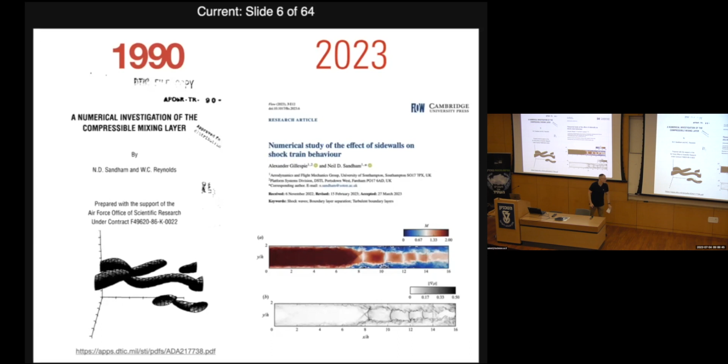And then, the most recent paper just appeared on studying sidewall effects on shock trains. And you can see the evolution of the field over the 30 or so years since he had his PhD. So it's really an honor to have him here today. This is the title and abstract of his talk, Unsteadiness of Shockwave Boundary Layer Interactions in Transonic and Supersonic Flows. I know that's a topic of interest to a lot of you. And with that, I'd like to invite Neil for his keynote lecture.

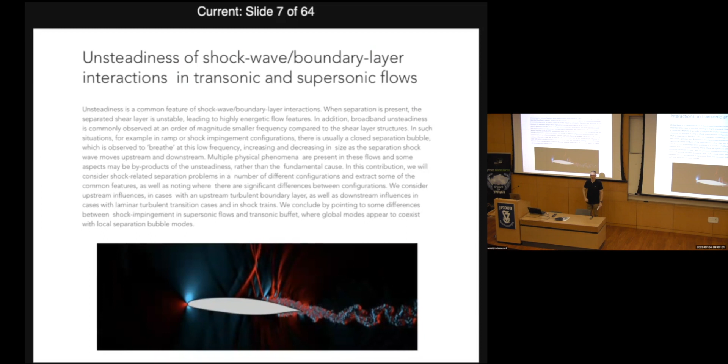It should be working. If not, you can do it the old-fashioned way. Let's slide that. Yeah. Let's do this. And it should work. Okay.

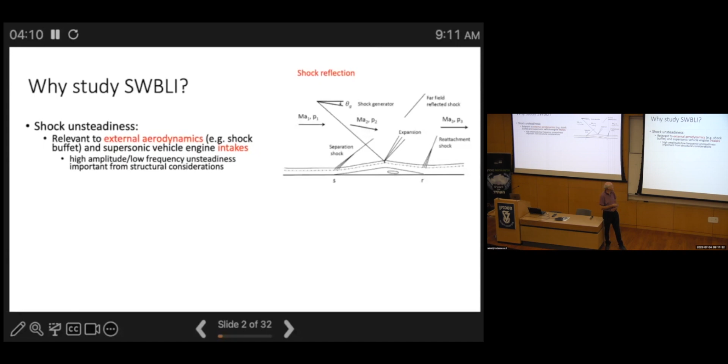So you can see all these types of interactions. So we're usually doing all three: laminar, transitional, and fully turbulent interactions, and we're interested in the unsteadiness, the shock separation, and the heat transfer aspects.

So I have to plug this on the computer.

This unsteadiness is not fully understood yet. So there are many active phenomena. If you go back through the literature, there's 50 years plus of research in this area. And particularly if you look into numerical simulations, you will find interesting phenomena. And the question is whether they're actually connected to the low frequency unsteadiness or just sort of a byproduct of the unsteadiness. And current research is really to find out what the essential mechanisms are.

What can we filter out as being sort of a byproduct of the fundamental mechanism? What remains that we can then use to model the flow, and also where can we apply flow control? So it makes a big difference if the mechanism is coming from upstream fluctuations in a turbulent boundary layer, or if it's coming from downstream, or if it's all contained within the separation zone itself, and still whether you can then do flow control with this.

So what I'm going to do in this talk is give you a little bit on 3D shockwave boundary layer interactions and buffets on aerofoils.

I just missed a little bit there. Oops. Let's go through this slide. There we are. Right, there was a little bit extra came here.

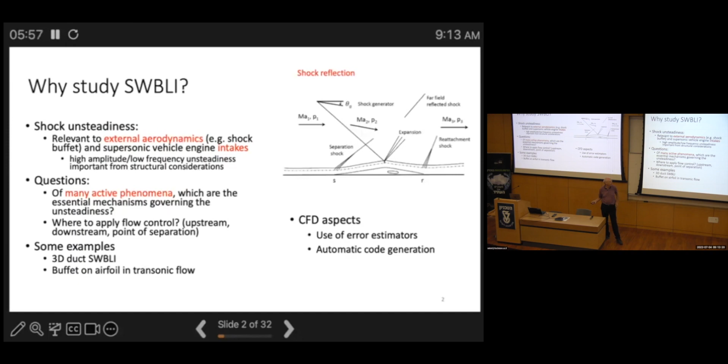So in terms of CFD aspects of what I'm going to talk about, there'll be a use of error estimators, which comes into how we do our large eddy simulations and how we design our grids when we go into more complicated problems. So I'll talk about that later. I'll start off though talking a little bit about automatic code generation. So this is a project that we've had over the last few years.

And it's to do with most places around the world looking towards exascale computers as the next step in capability. We're still wondering exactly what the architecture is going to be for that. And we have to take account of the fact that things could change as we go forward over the years. We need codes that can cope with different aspects of this move to exascale. So we're probably going to have some mixture of CPUs and GPUs. We can expect other changes in architecture. We start to worry about some of these other aspects. So energy efficiency is really important.

Tolerance: if you're running on millions of separate processors, what happens when one fails? Do you lose the whole job, or how can you recover from that? Data compression is a big problem, so we can't actually transport all the files now back to our local machines for post-processing. We will have to do almost everything in the simulation as it's running, and that includes doing the graphics. We don't really want to have to port our codes to every machine as it comes along, because things could change quite rapidly.

Very well, okay. Let's go back to where we were. Right.

So the ideal is this idea of a separation of concerns, that you as a PhD student or a postdoc working on this, or somebody in industry, you shouldn't have to be an expert in formulating the equations for your problem, doing the numerical method, and doing the optimization on the parallel machine that you're to use. So the idea is that we maybe design a system where at the front end, the user designs the overall problem. They set the equations they want to solve, they set the boundary conditions, they choose the basic numerical method.

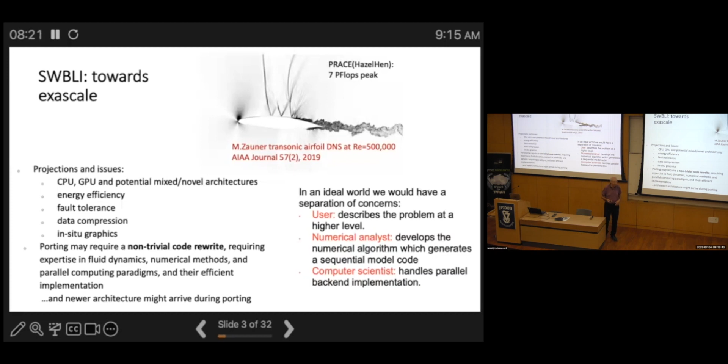Somewhere in the middle, the numerical analyst then develops the numerical algorithm. And at the back end, we put the computer scientists, they're the ones who do the optimization of this for the particular architecture. So people who are interested in developing optimal algorithms for different architectures would be working on the back end. So some time ago, we started looking together with colleagues who were then at Oxford, now spread around a bit. This time Reguly is in Hungary, Gihan Mudalige is now in Warwick.

We started looking at ways that we could use this Oxford parallel structured system. This is a way that we can write C code, or a special form of C code, and they have the software that then does the translation to back-end architectures. So the same source code then works on GPU machines or CPU machines, and they will take care of that final step.

What they've demonstrated is that they could get extremely good performance out of this, as good as handwritten code on the back-end computer. So this is an attractive system. Not the only way of doing it. There's possibilities. So you have to give the OPSC, let's call it, enough information that it can do a good job of optimizing.

So every little loop, this is just something that's doing an average of the +1 and the -1. This is the relative positions in a stencil. This is doing half of the +1 and the -1 and putting that into a new. You have to have all this extra overhead of writing this code that tells the backend how to do the optimization.

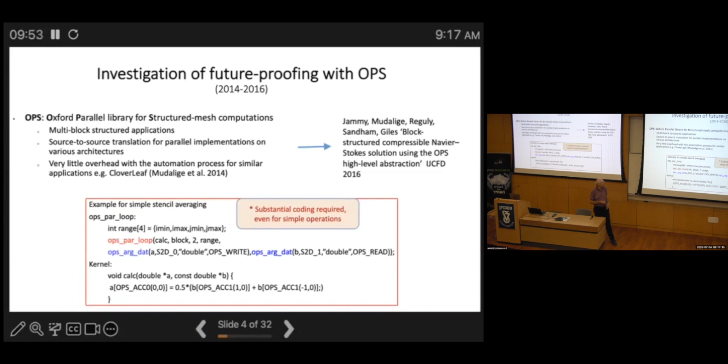So we were too lazy to do this. This looked like a lot of work to write very long code. So what we then looked at was putting a front end onto this, and this was just as Python was coming out with symbolic Python.

So what has developed out of that is kind of an ongoing experiment that we've called OpenSBLI, which is: can we come up with this sort of separation of concerns idea where the user writes front-end Python, then that gets translated with symbolic Python into the OPSC code, and then that gets translated into CUDA or into the lower level code, so MPI or CUDA, that you can then use to run your cases.

So there've been a few versions of this. I'll just explain the basics of them here. And you have various things you have to do within the system to define governing equations, boundary conditions, decide on your temporal scheme and spatial differencing schemes. And it was a way of going in and comparing lots of different finite difference schemes, lots of WENO, TENO schemes without having to do a lot of painful coding with that.

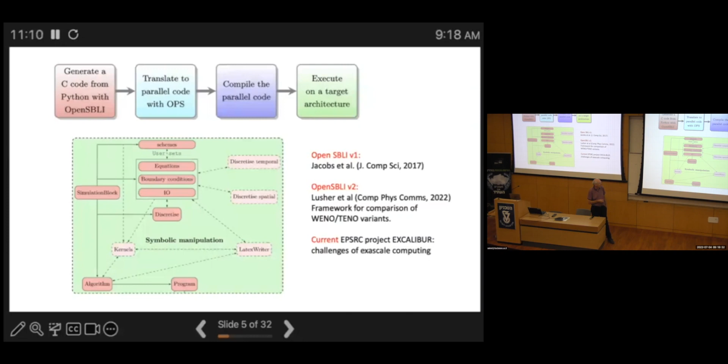So this has continued through a couple of iterations. There was the original version, it was without shockwaves. There was the second version, which included shockwave interaction problems. And then currently we're looking at what can we do with this kind of framework to get us to exascale computing.

Okay, so here's an example of what you actually do as a user at the front end. You're defining your governing equations. So here's the continuity equation, d rho by dt, minus the derivative of rho uj with respect to xj, and that gives us our continuity equation. Go through the same thing for momentum and energy, and you've done your equations. The symbolic Python takes care of expanding this with the Einstein subscript notation, and that then gives you a code, and you've represented your governing equations like this.

So this would then be an example of using this system to do a simple test case, Taylor-Green test case, where you have a breakdown of a simple initial flow in a triply periodic box down to small scale turbulence, and you monitor the enstrophy integral over your simulation, and then you refine the grid until you get to the right solution, you hope. This was compared to a spectral solution.

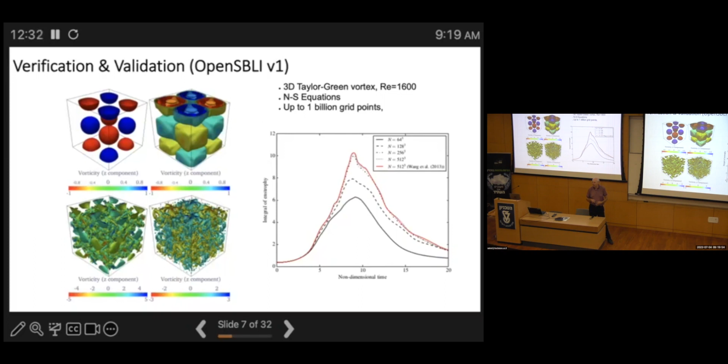There's another version of this, which is a bit more interesting, a high-speed version of this. So if you bump up the Mach number of this, then you will get shocklets forming within the Taylor-Green problem. And that's another challenging case for doing within these numerical simulations. So that's one of the things we've been working on recently.

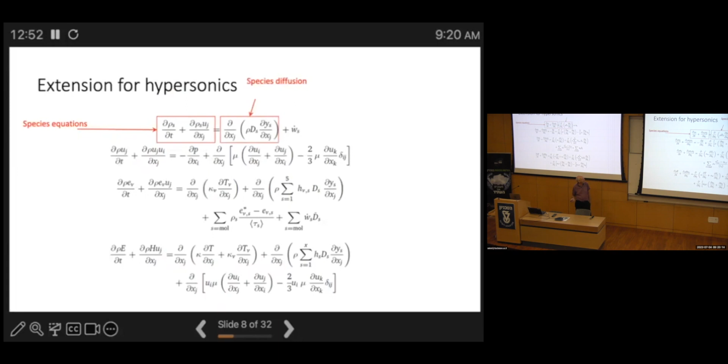The other extension that's come recently is a thing that I guess quite a lot of people have been interested in around the world, which is doing hypersonics. So if you go into a high-speed flow, you have to extend your governing equations. We need separate species equations. We have to add in diffusion terms. We have to add in chemical reactions. We've got vibration energy and non-equilibrium potentially, and we have the relaxation back to equilibrium terms. And we have chemical source terms coming into the vibration equation. So there's probably more of these boxes on here.

So the nice thing about the system here, writing this in Python originally, is actually it's still quite straightforward to write down the governing equations. You just have to fill in extra transport equations. It's just an extra few lines in the source code, and then you can use the symbolic Python to generate all the equations. So the job of actually generating code has been quite quick with this system. Debugging it has then been a different matter.

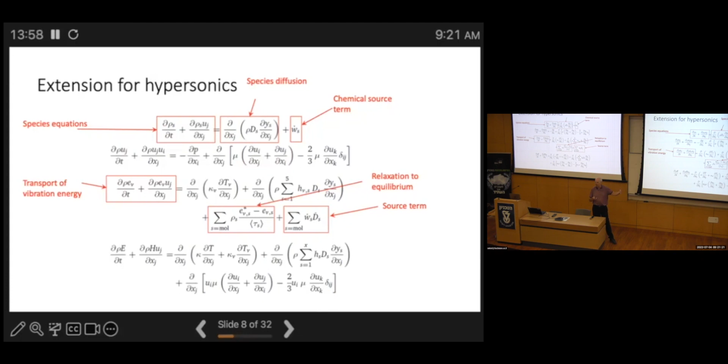So the debugging is where you do need people who are not only experts in the generation of the equations at the front end, but can also look at the numerical methods. And then occasionally we might find bugs in the back end where we have to talk to computer scientists to get that working. So it's not a panacea here. But here's an example of a high-speed thermochemical non-equilibrium example. So this is back to these simple mixing layer problems where I started a long time ago.

So this is a simple roll-up of a single vortex in a temporally developing mixing layer. So it's streamwise periodic, and we trigger the Kelvin-Helmholtz instability. In this case, we start with very high temperature, 4,000 Kelvin in both streams. And the roll-up of the vortex creates high temperature regions. So the region in the braid here becomes very high temperature.

And what you will then find is that you'll get non-equilibrium effects coming in. So in this case, the core of the vortex came down to low values of vibration energy. The braid went to high values of vibration energy. If you look at the non-equilibrium, it's actually the difference between the rotational-translational temperature and the vibrational temperature, which comes in during the entrainment process as the flow is heating up, and the vibrational relaxation is lagging behind. It means the vibration temperature lags behind the temperature rise of the entrained fluid.

And here's some chemistry going on. So this was a case that started from equilibrium. And because the core of the vortex has gone down in temperature, you've actually recombined oxygen atoms into molecules within the core of the vortex. So this is kind of where we're going with our hypersonics, and that's been enabled to some extent by using this code generation framework.

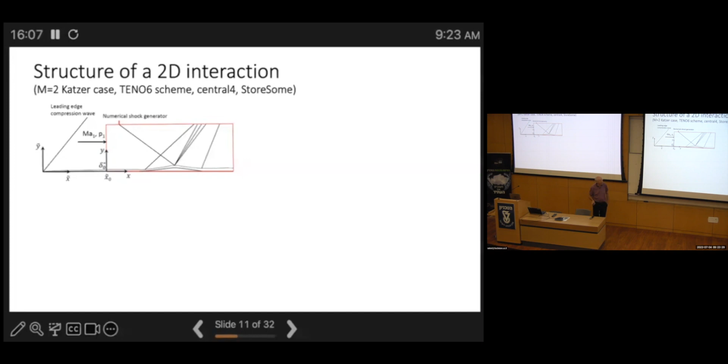So a bit more on physics of shockwave boundary layer interactions, and I'll get onto more numerical methods. So we have a basic test case, which we call the Katzer test case, which is a Mach 2 shock reflection problem. Katzer came through DLR sometime around 1990 and set up this 2D test case. And we're going to take this through some unsteady effects. So I've already shown previously some of the features of this.

So it's often common to do plots like this so that we can see the separation bubble, but you have to mentally unstretch this because this has been compressed in the X direction and stretched up in the Y direction. The actual separation bubble in a 1-to-1 aspect ratio looks like this. So they're very long, very slender separation zones. You've got the recirculation vortex down here. That's where the flow has the negative velocity. That's where the maximum reverse flow is located.

We've got a sonic line. That's the chain dotted line here. And the incoming shock wave will penetrate through the boundary layer until it gets to the sonic line. The waves will bend as they go through a region of decreasing Mach number. And then, in this case, there's an expansion fan that reflects off the sonic line. Those lines are bent as they go through the shear layer, and then you get the expansion fan coming off the back. But you have to remember that this is a very distorted picture of the same phenomenon.

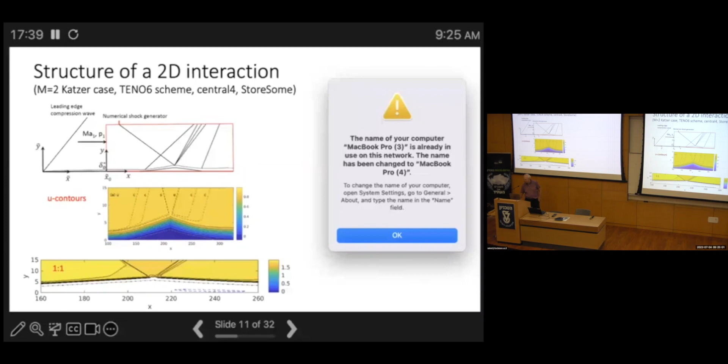Was it pressed twice? Maybe I'll start using the... Oh, hang on. The name of your computer is already on the network. Oh, sorry, I have to look at my phone here. That's why it's not working. Sorry, it's working.

Right, so some quantitative things that we can show about this. So here's the displacement thickness. Momentum thickness is approximately constant through an interaction like this. The displacement thickness follows a triangular shape, so a straight line region on both sides. What's the apex? There's a linear theory that you can do. This is just the standard supersonic thin aerofoil theory. We call it the Ackeret theory, and we teach this. And these are the symbols on this plot here, showing you what you can do with linear theory.

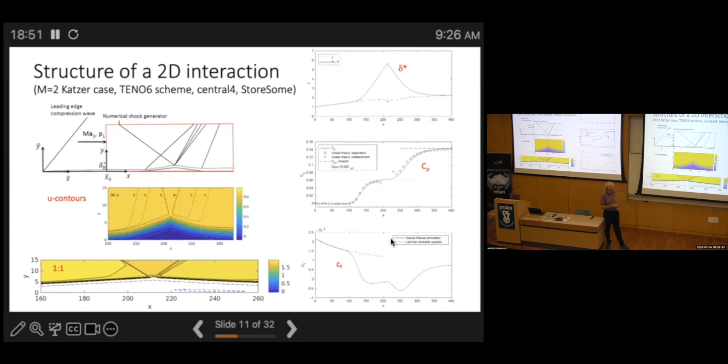And you can work the linear theory from the front towards the center of the interaction, or you can work it from the back again towards the center. And there's a little bit in the middle where it doesn't match, but you can do the separation and reattachment regions with the linear theory. And this then is the basis for the free interaction concept, that the structure of a separation zone is independent of how that separation is triggered. So you can get separations in different contexts. Let me carry on.

So I'm going to do some unsteady work now. So that's the basic test case as a 2D steady flow. We can then put in forcing. So here is some simple forcing put into the density equation. It's like an acoustic source, a simple source set in different regions. So we can put it upstream, downstream, or in the middle. And I'll just show you some examples of what you get if you try and force this shock-induced separation bubble with different frequencies. And there's been a whole study of different locations as well.

So if we force it upstream, but at relatively high frequency, Strouhal number of 1.3, where we base the Strouhal number on the distance between separation and reattachment, then we get a response downstream, which is in the form of alternate low pressure regions that are moving downstream. This is a shedding mode of the bubble. So you put in forcing upstream and you develop some vortex shedding within the bubble. Okay, that's something that we know about.

Okay, if we put in a low frequency, so now Strouhal number of 0.013, and we put this internally, this is where it's most effective at very low frequencies, then we get what's called a bubble breathing mode, and that's where the pressure is a function of time. So because there's a very steep gradient of pressure near separation and reattachment, we find that the local pressure either increases or decreases, depending on whether the shock wave is moving forwards or backwards.

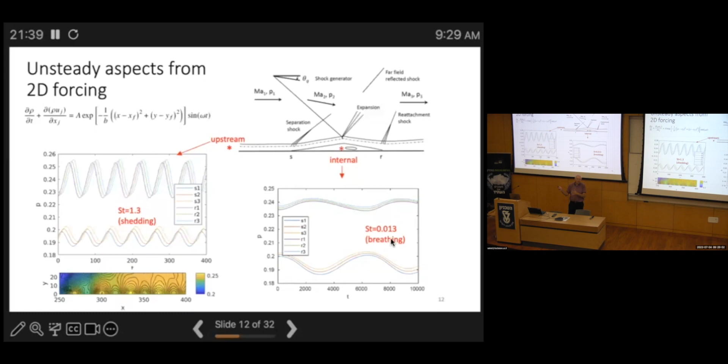So what you can already do in 2D is start to separate out the things that are maybe contributors to the physics of these problems. Okay, so is it an internal mechanism that is driving the low frequency unsteadiness, or is it the upstream? This starts to shed some light on that.

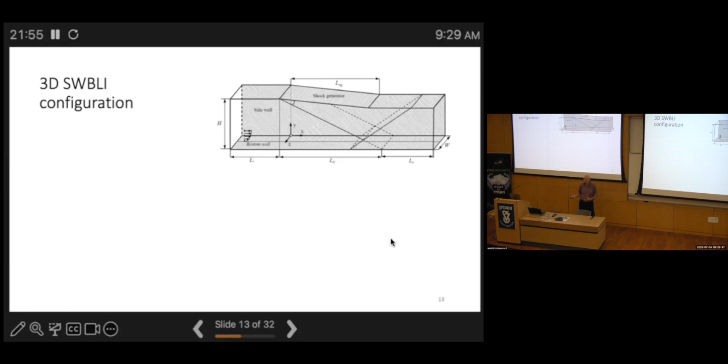Okay, so a more complicated case. This is now 3D duct flow. So we now have side walls in the problem. We've got a bottom wall, and everything is turbulent from the front onwards. There are lots of experiments and lots of numerical simulations, but this will be the first wall-resolved large eddy simulation, let's say.

So we're throwing in enough grid points to be able to resolve all the near-wall regions, but we're probably still a factor of 2 away from a direct numerical simulation in all directions. So these are still technically large eddy simulations, but they're approaching what you would get with a direct numerical simulation.

Okay, so I'm going to show you some results of a long, aspect ratio 2 case, I'll show what that means in a minute, where we ran 23 periods of the expected low frequency. So another issue of these simulations is just the sheer length of time you have to run to get a good statistical sample of your low frequency oscillation.

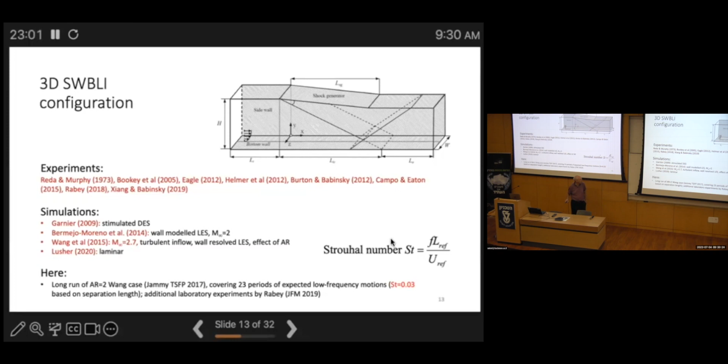And we're interested in Strouhal number. So Strouhal number here is the frequency times the reference length, the distance between separation and reattachment, divided by a reference velocity. And there were experiments as well.

So effect of aspect ratio. Now we're looking at contours on the lower surface. That's our test surface on which we're impinging the shock wave. And if you do it in a very narrow duct, so this will be one of the walls here, and this will be the other side wall. This is our main flow coming along, and there's a shock generator sitting above that generates the shock wave.

We get a very narrow region of separation. That's the dark contour here. It shows where the reverse flow is. And we also have contours of pressure shown here. As we increase the aspect ratio to 2 and then to 4, you'll see that the center of the separation becomes more two-dimensional like.

But you have to go to very high aspect ratios before you get back to what a 2D simulation would give you. The region near the wall actually doesn't change very much. So if you just focus on the region very close to the wall, then that region has stayed fairly constant as we go through the changes.

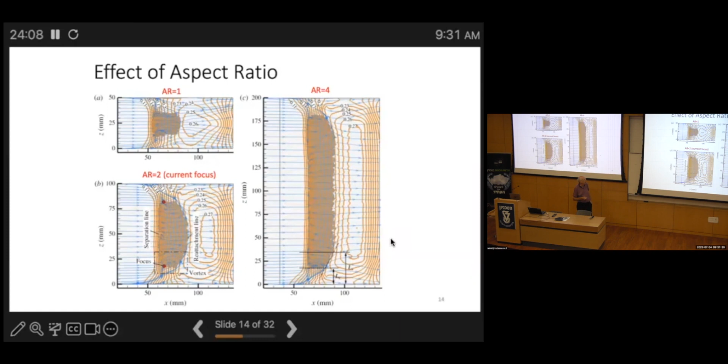So the actual corner flow is not so sensitive to aspect ratio, but the overall flow is sensitive to aspect ratio. Okay, here's a separate view of that, and you'll see there are distinct regions of separation. There's a corner separation here, and there's a central separation.

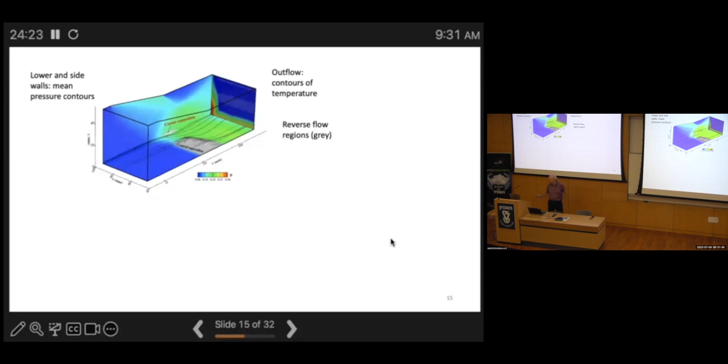So we've got a main separation, we've got a corner separation. We have power spectral densities. Let me just show that one again. So you now take all this data, you've got time series of pressure data on all the surfaces. You then Fourier transform that, you do your Welch algorithm and figure out what's going on in spectral space.

And what we find out is, so the vertical axis here is going in the x direction through the interaction, and we're showing contours of the power spectral density as a function of Strouhal number in this direction. So what pops up at separation, close to separation, is this very low frequency and high amplitude fluctuation. So that's the separation unsteadiness.

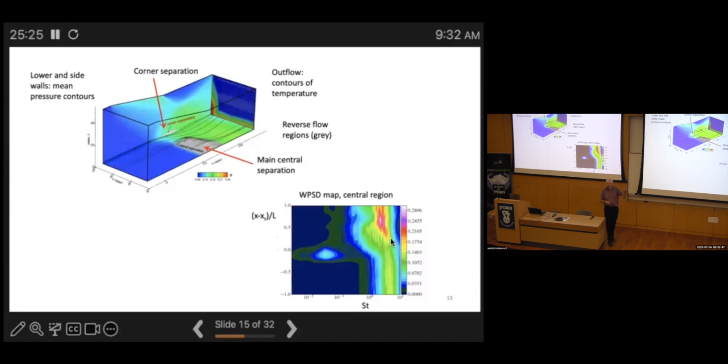This is the turbulent boundary layer that comes in from the inflow. We'll go for the standard turbulent boundary layer spectrum here. That goes through big distortion in the separation zone and then starts to reform, but as a thicker boundary layer downstream of the interaction. And then what's interesting is what happens to this in the sidewall region.

So now we're looking, this is now in a plan view, and this is at Strouhal number 0.03, so this is the low frequency that we're interested in often. And this shows us the main area of low frequency across the core of the channel, but then we pop up these little regions of low frequency in the corner region.

And what we've been interested in is whether the corner separation is connected with the main separation. Because we've got these two different separation zones. They both have low frequency. Okay, but are they kind of in phase with each other, or are they kind of independent? Remains to be seen. These were experiments that Paige Rabey had run at Imperial College that showed similar structure, although they weren't able to measure into the corner regions.

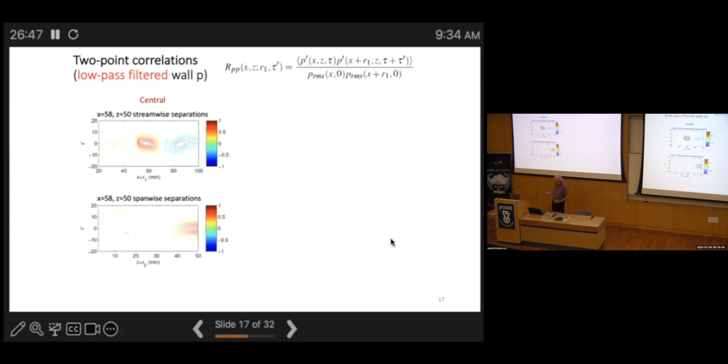Okay, so when we've got 2-point correlation where we get regions that are out of phase, then that corresponds to a breathing mode. We saw it before on the low frequency response of the separation bubble. So where we've got the red regions here, this is our reference point, and then we look in this case downstream. We've got a breathing of the separation bubble because this is out of phase with this one, and we also see the same thing in the spanwise direction in the corner part of it.

So what we were able to say from this piece of work was that the unsteadiness of the corner vortex is not connected with the unsteadiness of the main vortex, even though they're in the same view. They're not actually correlated with each other. They're independent separation zones that are developing.

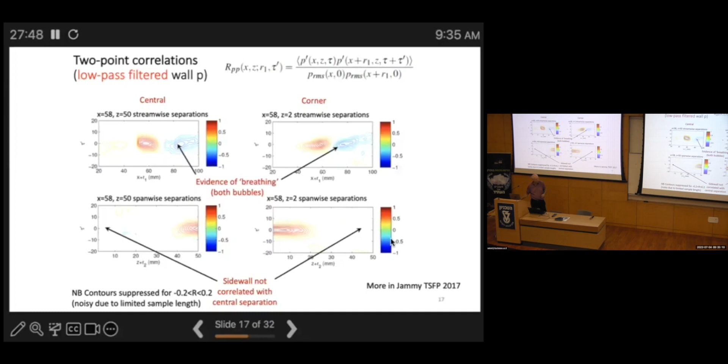Okay, so now I'm going to switch to the transonic buffet. So we've got 15 minutes or so. So transonic buffet is another example of a high amplitude, low frequency oscillation. Okay, but we're going to come back at the end of the talk and look at the differences between these two. You can find global modes in RANS calculations, whereas you can't for the shock reflection problem. So this is an example of a globally unstable flow as found in RANS.

So Crouch and Timme will be two of the names to look for in global modes of these kinds of unsteady transonic flows. So transonic, we have more communication. We have the possibility of sound waves going around the whole aerofoil configuration. So something from the trailing edge would go all the way around the aerofoil, whereas when we have a shock reflection problem, everything is supersonic and we don't get as much upstream influence. It can only go through the boundary layer.

So I'll talk a little bit about methodology and a little bit about some of the results. So this is now back to our original code. This is the classic code, the Fortran code, and the numerical methods are a bit classic as well. So don't regard these as being particularly new now, but at the time, I think we hit on quite a nice combination. So these are explicit codes.

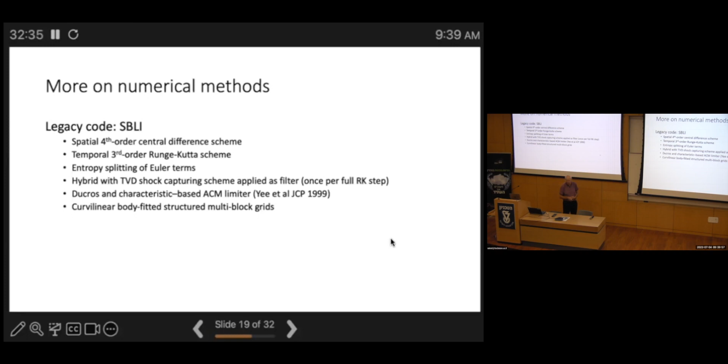There are bits that could be improved, but it's been extended to curvilinear body-fitted multi-block grids in the intervening years. What's slightly new here is the use of spectral error analysis when we get to doing airfoil grids. So we're trying to design our methods for doing airfoils, and we're trying to do large eddy simulation, and so a big new variable is how you design the grid.

And what we did here was borrow an idea from spectral element methods and discontinuous Galerkin methods, where you have access to all the spectral information within all of your elements. What we tried to do was a finite difference version of that, where we break our domain into little 32 squared or 32 cubed elements. We do a Fourier transform to find out what the local spectrum is doing.

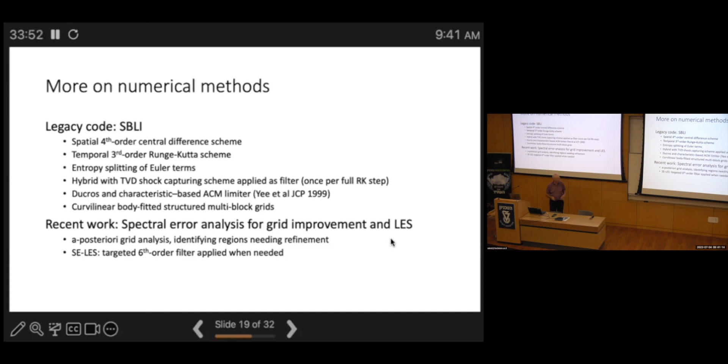And then we make use of the fact that we know how our method fails when it's suffering from low resolution. We know that we get grid-to-grid point oscillations, because we don't have other methods to kill off grid-to-grid point oscillations. So if you know the way your code is going to fail, you can use that to help you tune the grid, so you've got enough resolution in the regions where you really need it. And then we've extended that to do an LES method as well.

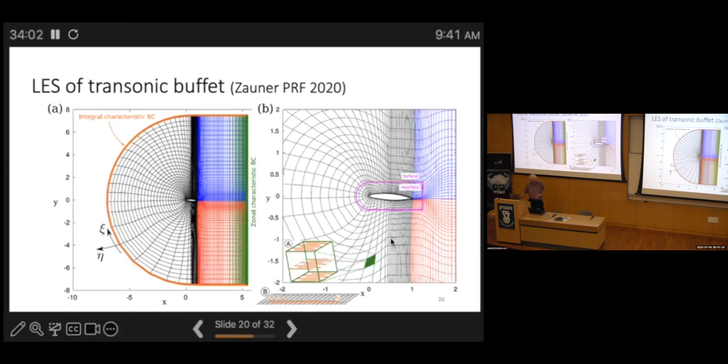So the grids that we're using are horrible structured grids with a multi-block formulation, and we have the usual characteristic boundary conditions around the far field. So there's nothing very interesting there. But the way the code fails is that if we look in the spectrum, we'll see a turn-up of the spectrum at high frequencies, high wave numbers.

And if we know that that's happening, then the idea is to figure out where it's happening and flag up that this region is under-resolved. At this point, we've not got other filters in the problem that are taking out those oscillations, and we don't have a numerical method that naturally takes them out. So we're trying to detect those sorts of oscillations. And we just flipped over two slides. So we can do that without doing an entire Fourier transform.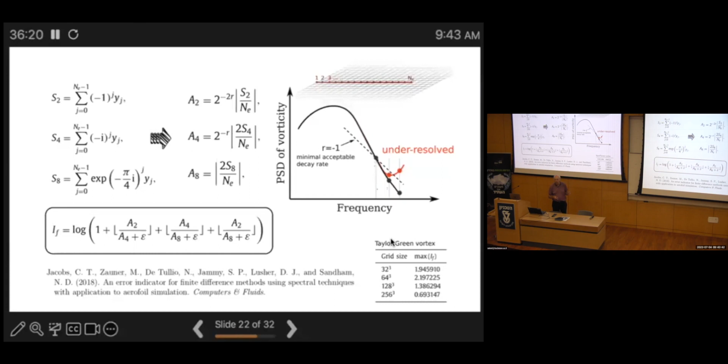This floor symbol here is like an integer truncate in the code, and that means that we would come out with 0 for this if we were in what we think is a well-resolved region of the flow. If your spectrum starts to turn up, then these numbers turn into ones or even higher, and that puts up this indicator function to higher values. So we've got a way of extracting relatively cheaply where the regions are that are under-resolved in the flow. So then you can color code these.

This has actually now gone to the next step where we have a filter that's tuned on this method to only put filtering in where we detect this upturning of the spectrum. So this is the attempt to get this into a large eddy simulation. Then, a posteriori, you can check how often your filter was actually active.

So then we have regions with no color where the filter is not turned on at all. And then we've got regions here that are blue, green, and red. Red means that you're having to apply this filter frequently within your code. If it was a direct numerical simulation, then we wouldn't have any of these other colors. So that's kind of been the use of this.

So two uses. One in designing the grid. You just iteratively run a simulation, tens of thousands of time steps, but not to completion. Check where you're under-resolved, refine the grid in those regions, do it again, and iteratively you get your grid sorted out, and then actually run the simulation with this filtering and see how much filtering you're having to do. There are a few validation cases.

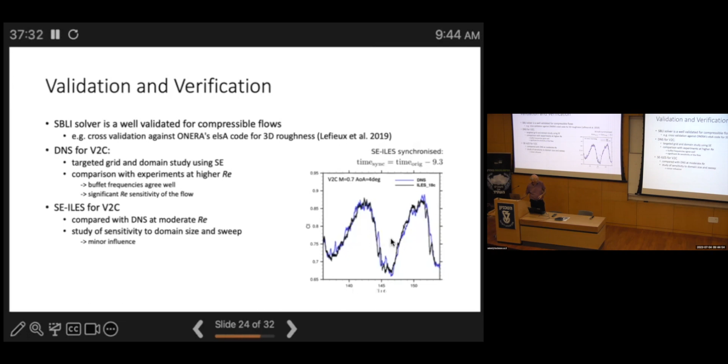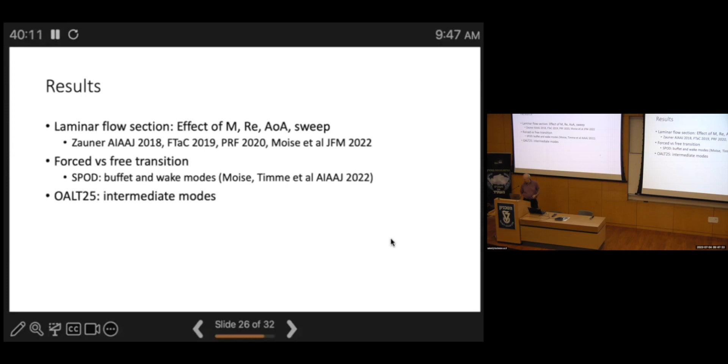And there was also an opportunity to look at some sort of data-based analysis of the different modes that come into these simulations. Okay, and we're still interested in other modes here, say intermediate modes. We're still interested in those. So we get quite a lot out of these XT diagrams.

So we're also querying some of the modeling of this, because all of the modeling assumes you have a single shock wave that then moves upwards and moves forwards and backwards on the aerofoil. Okay, and the shock wave is considered a key part of these theories of transonic buffet. But if you replace one shock wave with three shock waves, as we got here, and we still got buffet, then clearly the single shock wave is not critical to any mechanism of buffet.

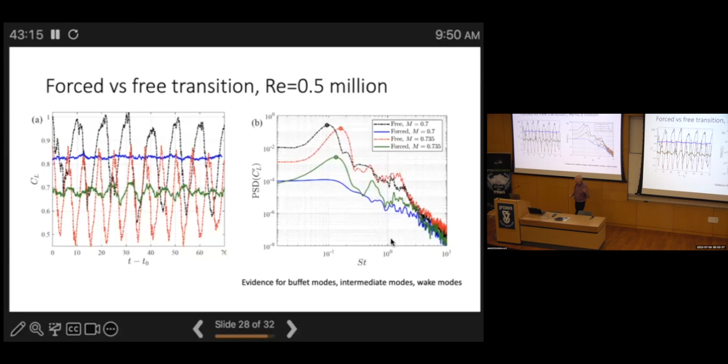If you shift to a higher Mach number where the buffet is better established, you get the red line. And then if you force that, you go to something where the buffet is still present, but weaker. So the problem with these laminar flow aerofoils is the very high amplitude buffet that you get. Here's some examples of high lift and low lift to show you the changes that are going on.

So with the free transition, at the high lift phase, you get a really large region of supersonic flow. And at the low lift phase, you get a small region of supersonic flow. If you look when you force the transition, then you get a much smaller difference between them because the shock wave is not moving as much during this cycle.

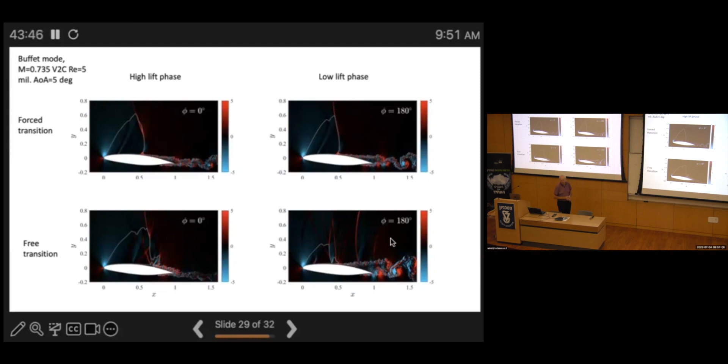And these are some pictures of the different cases. This is the free transition case. This is the forced transition. And then we've got the different wake modes. So the SPOD has been a useful tool here for extracting information from these very large simulations.

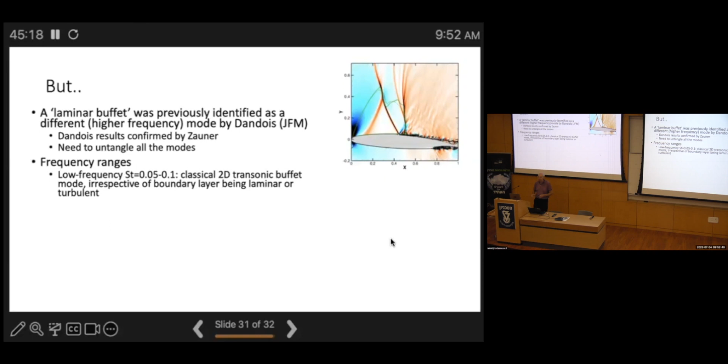Okay, so I've already mentioned we have a naming problem. So laminar buffet was already found by Dandois, okay, but he found it for a higher frequency, which was a separation bubble mode, whereas there is also a buffet mode at low frequency. So what we would argue is that there is always present this buffet mode, whether you have a laminar aerofoil section or a fully turbulent section. Okay, but in some instances, you can get this extra mode in the separation bubble.

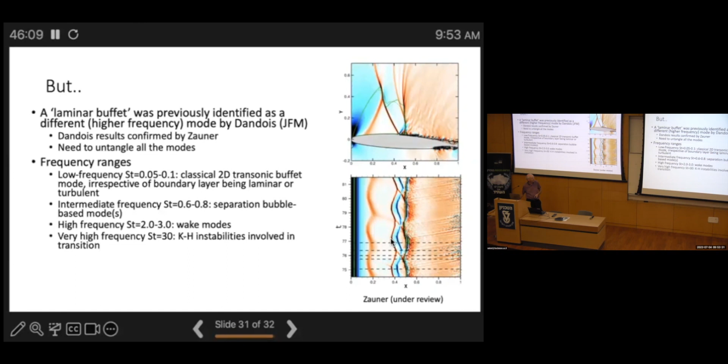And what can happen in experiments is that you can see that medium frequency mode appearing first. So as you increase the Mach number or you change the angle of attack in your experiment, sometimes the very first lower frequency that you observe might be this intermediate frequency. But if you keep going, you will then see the low frequency emerging at a later time. Okay, so we've got all these different frequencies. We've got the classical 2D buffet, we've got intermediate frequency, we've got the high frequency, and we've got Kelvin-Helmholtz instabilities at very high frequency, and they're different.

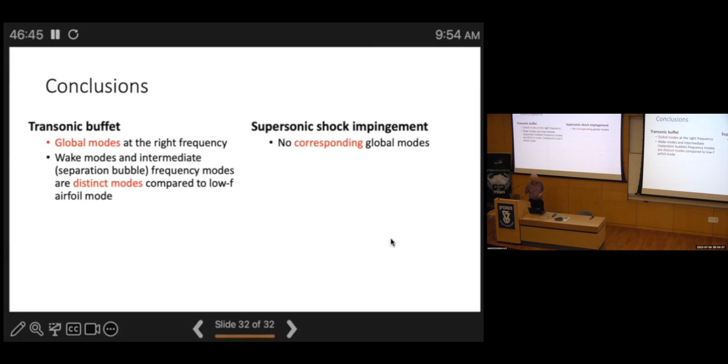So I will just conclude with some of the differences between transonic buffet and the shock impingement problem that we had earlier. So transonic buffet, there are global instability modes. Okay, even in RANS, you can do a RANS calculation and detect these global modes. If you do a supersonic shock impingement problem, then you won't find a global mode, at least for these typical strengths of bubbles. So there's no corresponding global mode. Transonic buffet, we have wake modes and separation bubble. Okay, and they're separate to the low frequency mode.

In the 3D duct case, if you've got multiple separation zones, you've got multiple low frequencies going on, and they're of independent origin. These things will pop up inside any separation zone. Shockwaves seem to be a byproduct of the unsteadiness, whereas the classic theories of transonic buffet tell you that the shock is a key part of it. It's acoustic waves coming from the trailing edge, interacting with the shock wave, and that forms a sort of feedback loop that then sets everything going. If you take away the shock wave from that, then the theory is missing a very key component. So a lot of the theories of transonic buffet are likely to be at least incomplete, if not incorrect.

Okay, and then for the other case, the shock reflection problem, then we have more of a response problem. It's not a global instability, it's a response to forcing. And then you have to think, is it the upstream, is it the downstream, is it the disturbances inside the separation zone that are important? And this probably changes for different strengths of interaction. Very weak interactions, it can be upstream, but for the majority of cases that we've looked at, it's the internal mechanism that is the key mechanism for the unsteadiness of shock reflection problems.